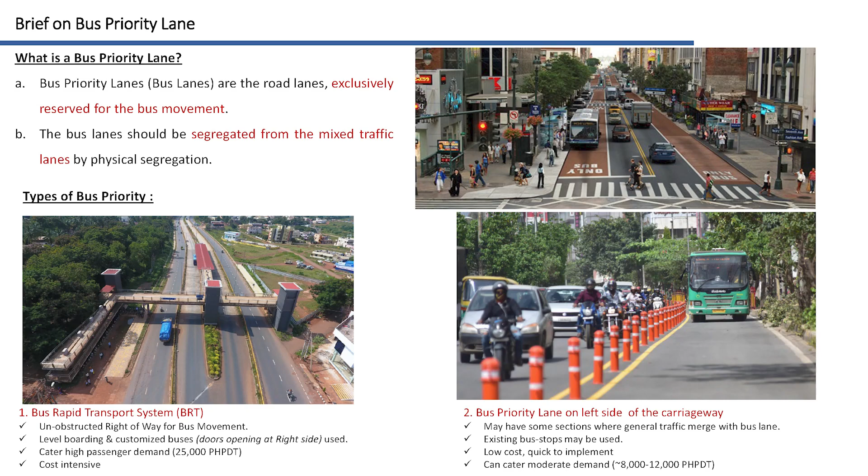Next is why bus priority lanes are required. The reasons are, a bus priority lane can move more people in less time. The second thing is, since it is able to move more people in less time, it provides more reliability towards public transport. Number three, it is a low cost infrastructure and also easy to install and scale up.

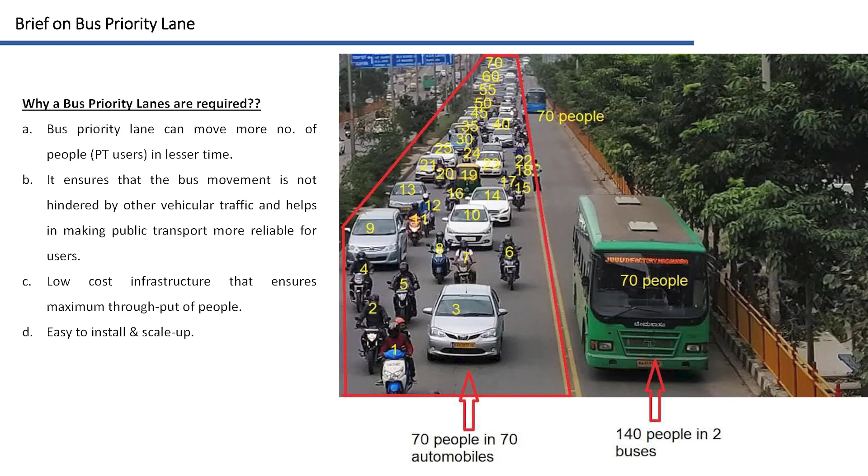Now, how to plan for a bus priority lane? The first step is the concerned ULB and the respective transit agency shall jointly identify the bus priority lane within the city limit area. While identifying the bus priority lane, there are certain things which shall be kept in mind: the minimum width of the bus priority lane shall be 3.5 meters. The bus priority lane may be segregated from the mixed traffic through bollards, barricades or lane markings.

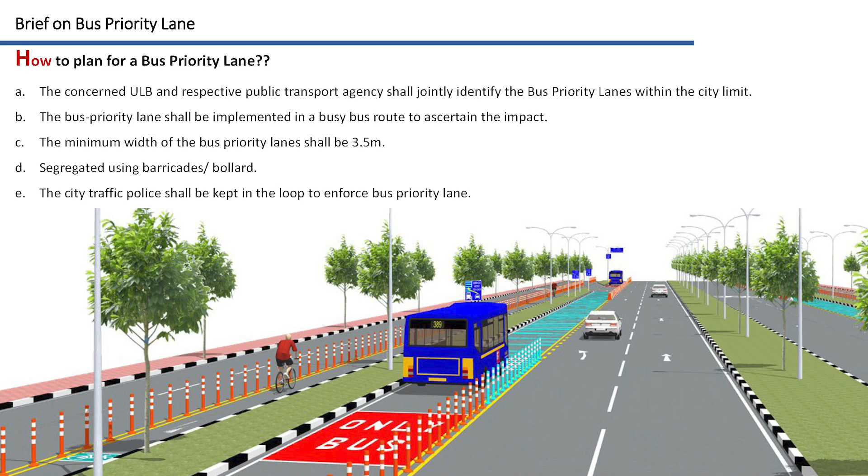The bus priority lane shall be implemented on a busy route where the frequency of buses is very high. And one most important factor is the traffic police shall be kept in the loop to enforce the bus priority lane.

Now let's see what are the major components of the bus priority lane. There are three major components we actually identified. Number one is the junction design and the bus stop location. Number two is the corridor design with the provision of entry and exit points. And number three is the signage. Details on each of these components are explained in the coming slides.

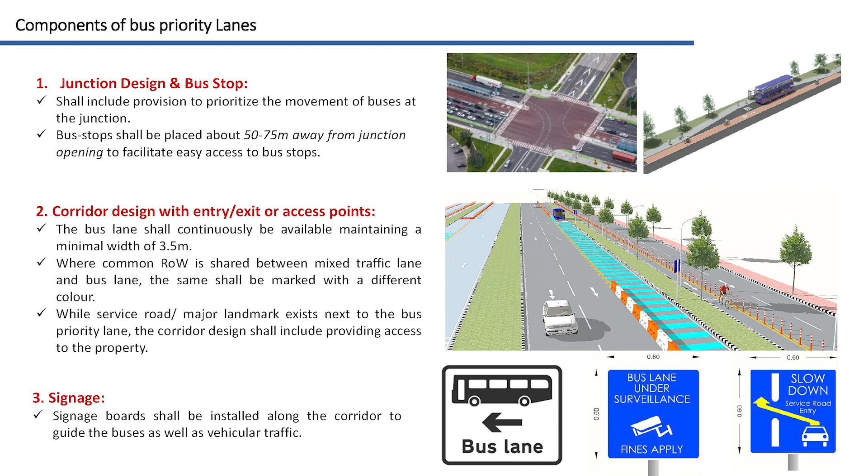So the first component is the junction design. So now let's see what are the junction design principles that should be adopted while designing a bus priority lane. So point number one is the bus movement shall be prioritized at the junction.

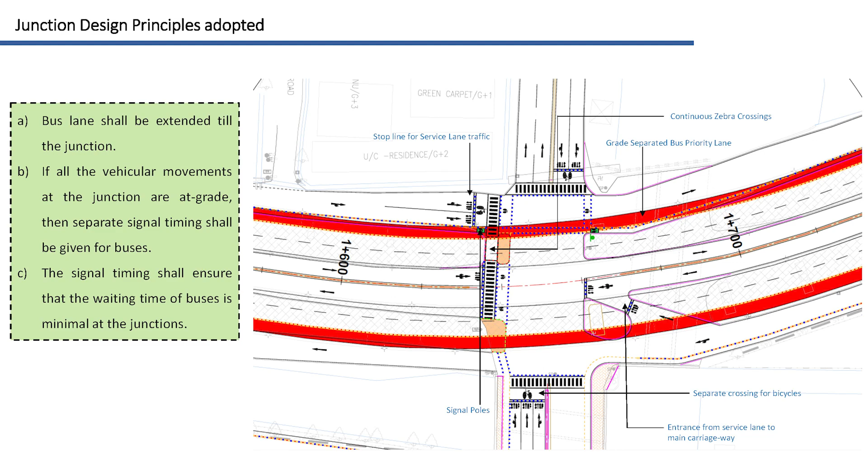Next is the bus lane shall be extended till the junction. Other things are like if all the vehicular movements are at grade at the junction, then a separate signal timing shall be used for the buses. And the signal timing shall also ensure that the waiting time of the buses is minimal at the junction.

Now coming to the bus stop locations. Now the question is where the bus stop shall be located in a bus priority lane. Usually the bus stop shall be located 50 to 75 meters away from the junction to facilitate easy access to the bus stops.

The bus stops also shall be well integrated with the bus priority lane, and it should have a provision to accommodate minimum 2 buses simultaneously. However, if the space permits, the number of buses which can be accommodated can be increased to 3 or 4 also.

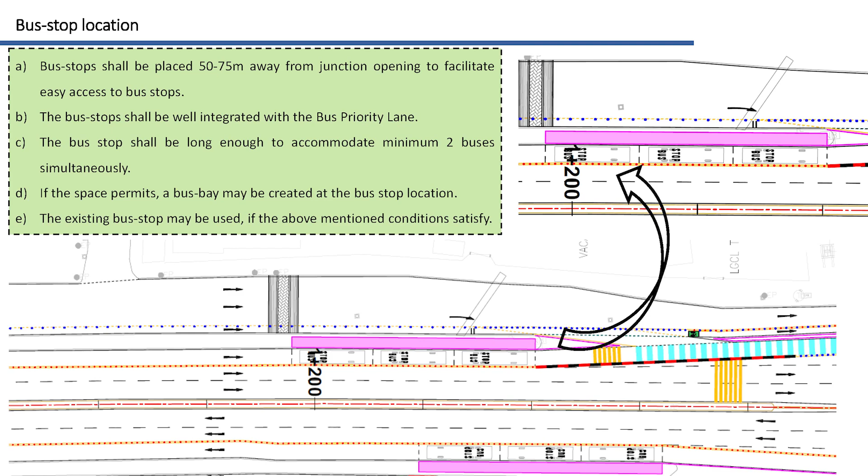The next important design principle is the corridor design with entry or exit point or the access point. So wherever there is a service road or a major destination point next to the bus priority lane, we have to design the entry as well as exit point to the service lane, and also the entry point to the bus priority lane from the service road.

As you can see in the picture, 100 meters prior to the entry and exit point, the bus lane becomes a shared traffic lane to facilitate the merging traffic. So when the bus priority lane becomes the shared traffic lane, it can be marked with a different pigmented color on ground, so the bus drivers and the motorists get to know that there is an entry or exit point ahead and they are in the mixed traffic zone.

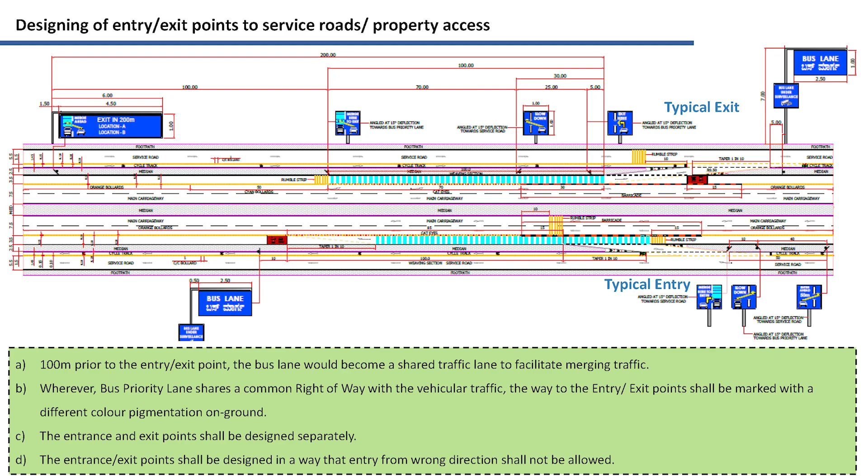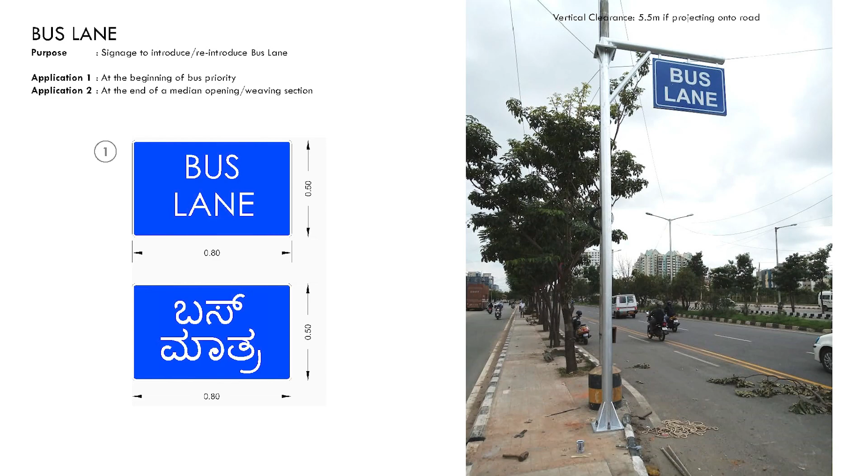The third and important thing is the usage of signages along the bus priority lane. So wherever there is a bus priority lane, it shall be clearly indicated and the information shall be provided both in English and in Kannada. So where shall this bus lane signage board be installed? It shall be installed at the entrance of a bus priority lane.

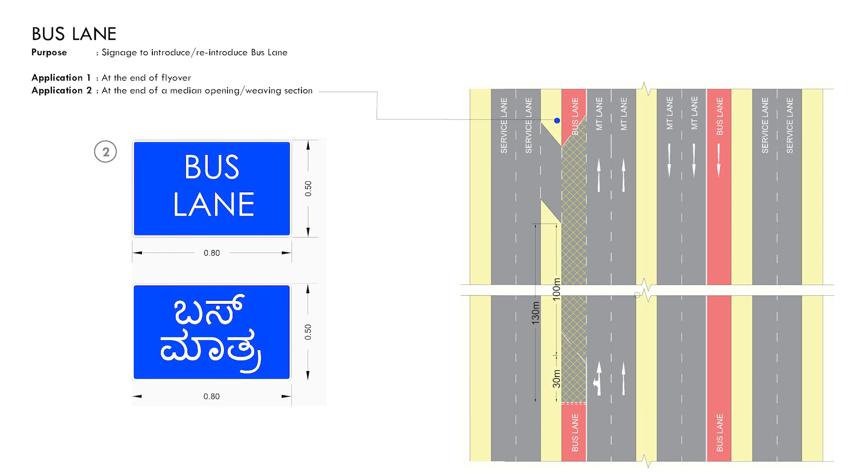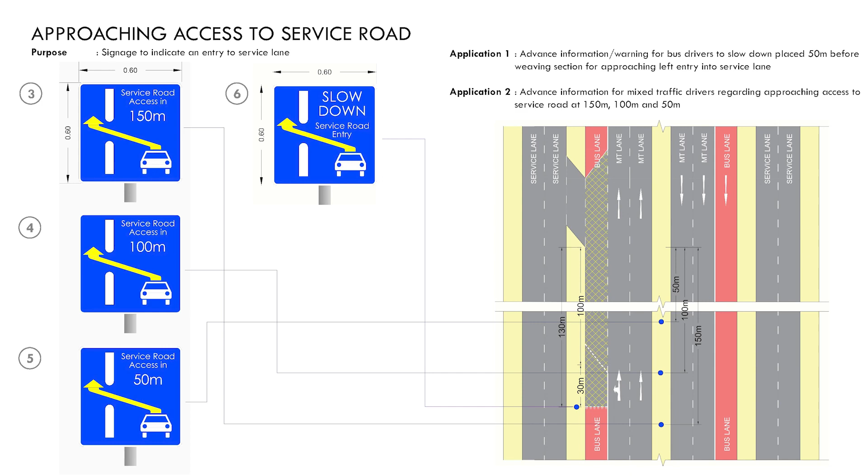So whenever there is a discontinuity in a bus priority lane and the bus priority lane starts after the discontinuity, the signboard shall be installed right there. Wherever there is an exit from the bus priority lane, signage boards indicating that the opening is 150 meters ahead and 50 meters ahead shall also be installed along the bus priority lane.

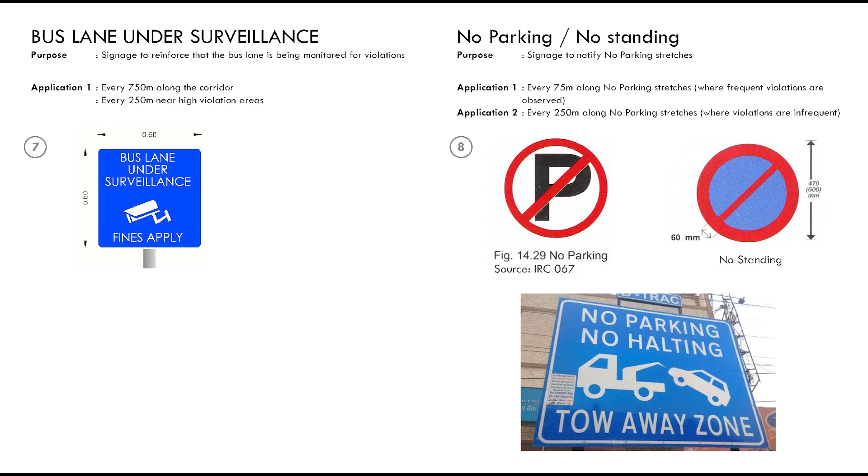Another important set of signboards is to inform the users that the bus lane is under surveillance and there is no provision for parking or halting in the service road or over the bus priority lane.

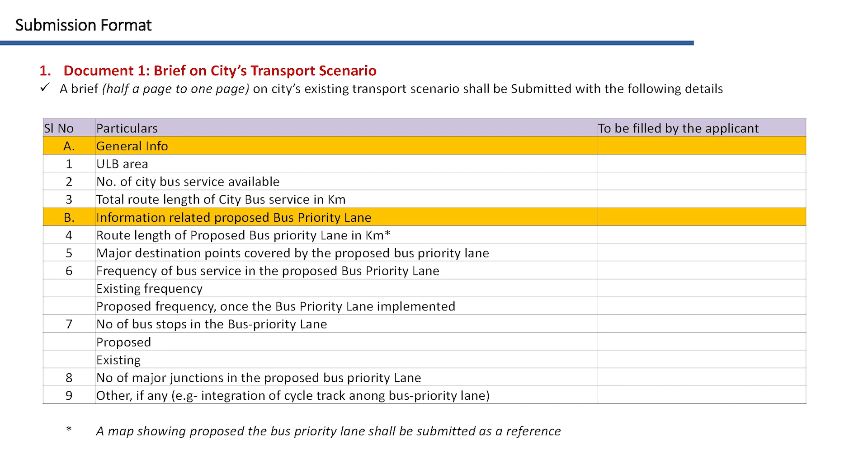So when we talk about the submission, there are 3 major documents that the respective cities are to submit in the next stage. Number 1 is a brief on the city's transport scenario, which shall include the route length of the proposed bus priority lane, the number of bus stops in the bus priority lane, number of major junctions in the bus priority lane, etc.

Number 2 is the concept plan of the bus priority lane, including the cross section. So the concept design of the bus priority lane shall include the cross section in AutoCAD format and also the junction design plan to understand what interventions the cities are thinking of at the junction. So all the drawings shall be submitted in AutoCAD format to DULT.

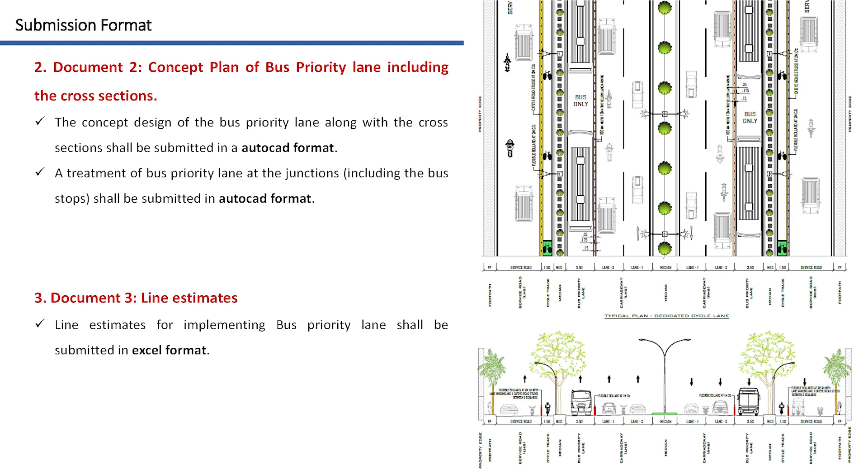Number 3 and the last one is the line estimate. So the respective cities shall make estimates to implement the bus priority lane. As of now, we have received responses from 7 cities, and all the cities are requested to submit their proposal by 15th of October to the DULT mail ID.